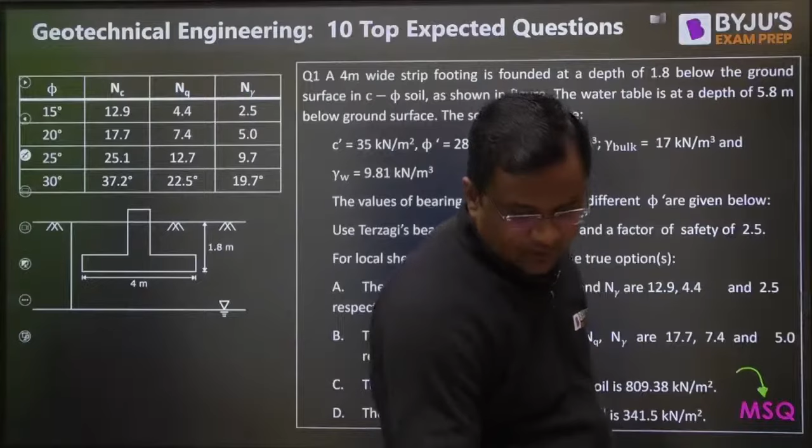The 1.8 meter is the depth and 4 meter is the width. Water table is at a depth of 5.8 meter. That means we only go up to Df, this is Df, and then B more - so 1.8 plus 4. We only go up to this much term for writing anything, and the water table is below that, meaning there is no effect of the water table.

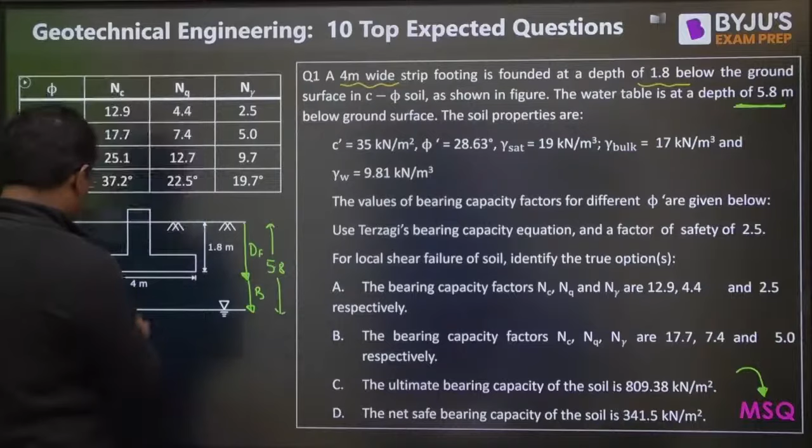Okay, C, phi, gamma bulk, gamma W, everything is given. Even if gamma W is not given, we will be taking 9.81 in every subject, not just in soil.

Now guys, using the Terzaghi's bearing equation and a factor of safety of 2.5, it is asking certain things: bearing capacity factors, ultimate bearing capacity, and net safe bearing capacity. So what is net safe? Net safe is Q net ultimate upon factor of safety. This is net safe and this is QU.

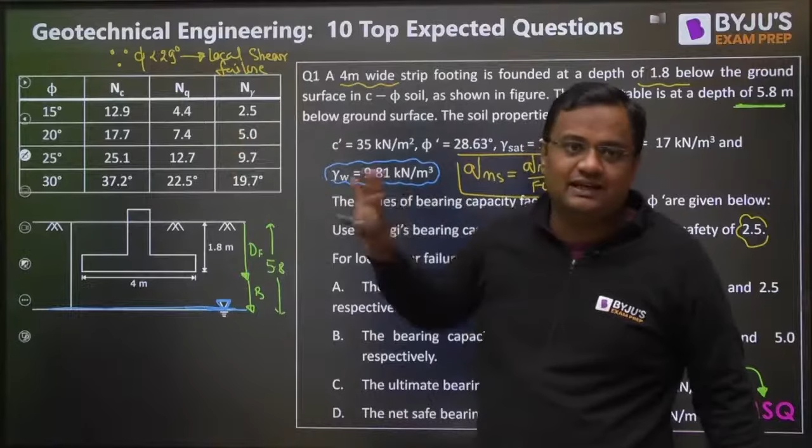Now guys, before I go further, what is the value of phi? Since phi is less than 29 degrees, it will be local shear failure, and whenever there is local shear failure, we have to slightly change the formula. In some books it is written as phi less than 28, in some it is less than 29. Since the value is 28.63, and they have given different NC, because when there is local shear failure we want different NC, NQ and gamma, that is why from the question itself we know this is a case of local shear failure.

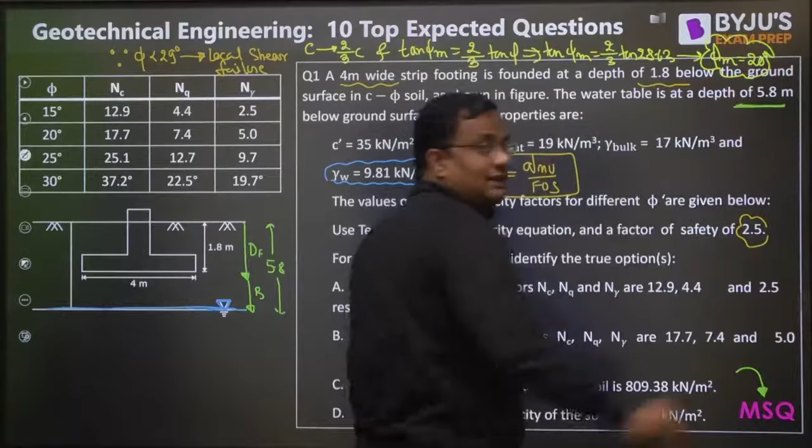Since it is local shear failure, we'll be dealing with this. Phi less than 29 or 28, it will be local shear failure. Since different values of NC, NQ and gamma are given, that means it is asking from local shear failure, so we'll be taking these values. The other values are not required at all. So 17.7, 7.4 and 5. So B is correct and A is incorrect. Excellent, Saksham, excellent.

Moving further, Saksham you are saying D is also correct. Okay, please check your calculations. Now I want to find the ultimate bearing capacity. So QU will not be writing C NC, we will be writing 2/3, because in local shear failure instead of C we will be using 2/3 C NC, plus Q NQ, plus half B gamma N gamma.

Now guys, it is a strip footing, therefore no shape modification factors. So 2/3 into C is 35. What is NC? NC is 17.7. Excellent question guys, the level of questions today is excellent.

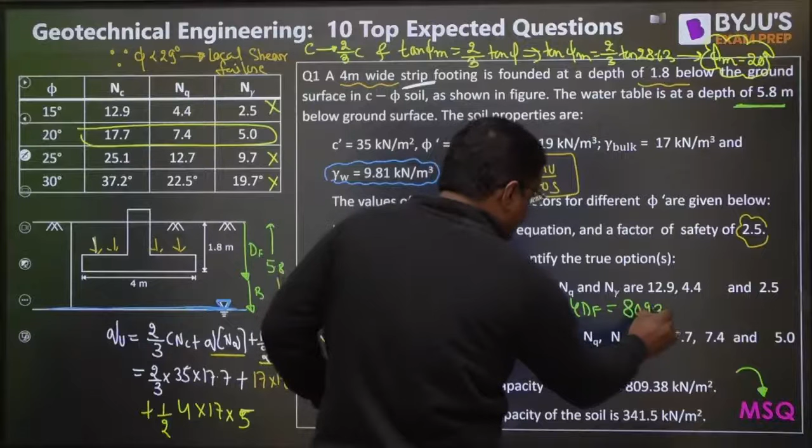Now, this is QU. What is QNU? QNU is QU minus gamma DF. QU is 809.38 minus gamma bulk into 1.8. So from here the QNU value is coming to be 778.78.

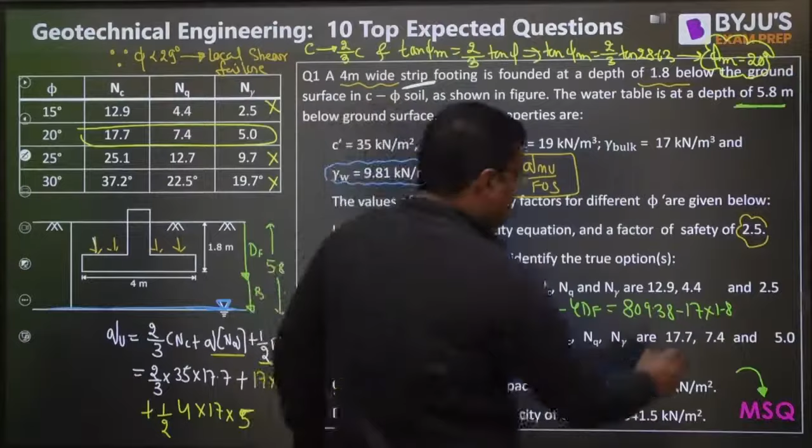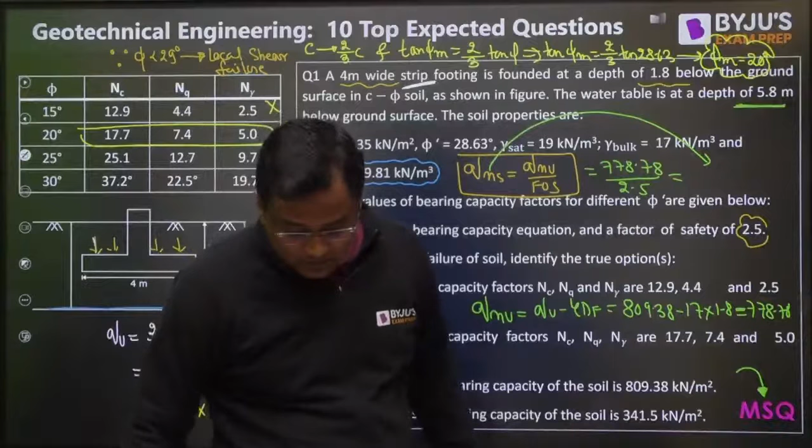778.78. Net ultimate is not asked, but okay. 778.78 upon factor of safety 2.5. So what does this QNS value come out to be? 311.5, not 341.5. So the answer will be B and C.

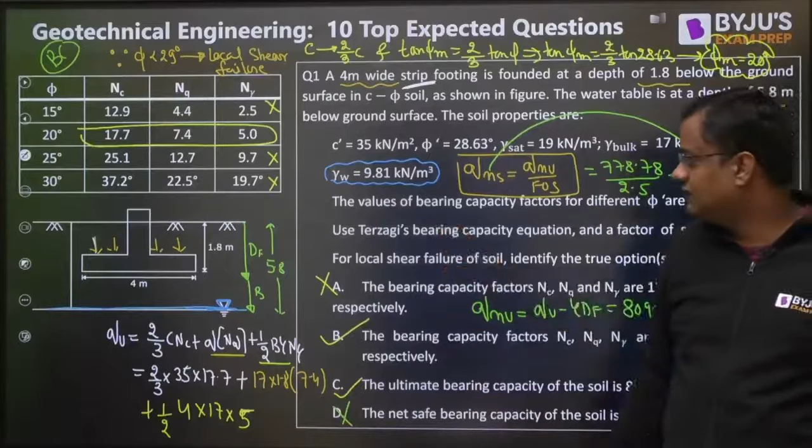Suppose there is a retaining wall, and here we are having the soil. Now what is the intensity of Q such that there is no tension crack? That means the negative part should not be coming.

So from here, sigma H is equal to Ka into sigma V minus 2C root Ka. We are getting this much.

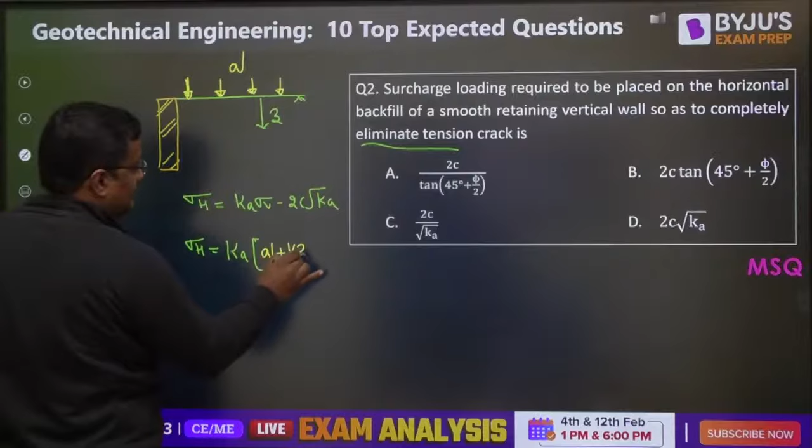Ka into sigma V, where sigma V is the surcharge Q plus gamma Z at any point. So the horizontal stress becomes Q plus gamma Z minus 2C root Ka. This should be greater than 0 - the minus value should not be coming, or at most it should be 0, not lesser, otherwise tension will come.

So from here, at the top the critical region will be this, because below it will be positive. If Z is increasing as we go downward, this will anyhow be positive. The most critical case will be at the top, so Ka Q should be greater than or at most equal to 2C root Ka.

From here the value of Q is 2C by root Ka. That is option number C, but since it is MSQ, we have to check the other options also.

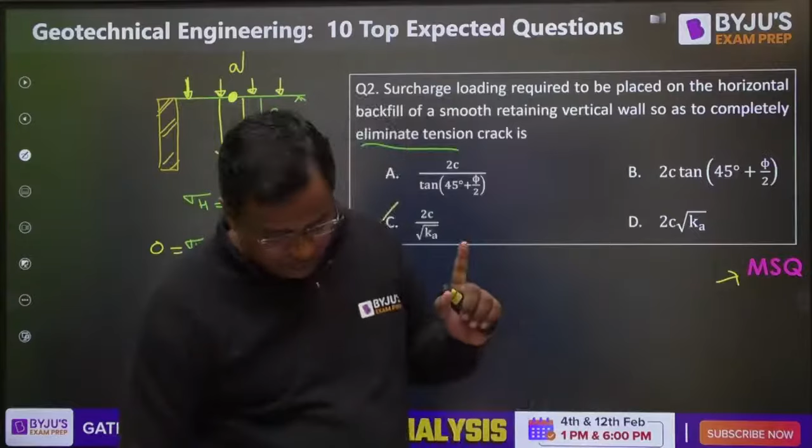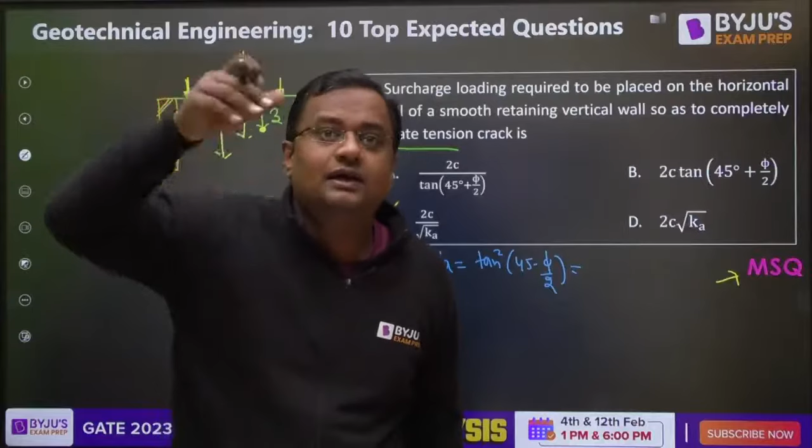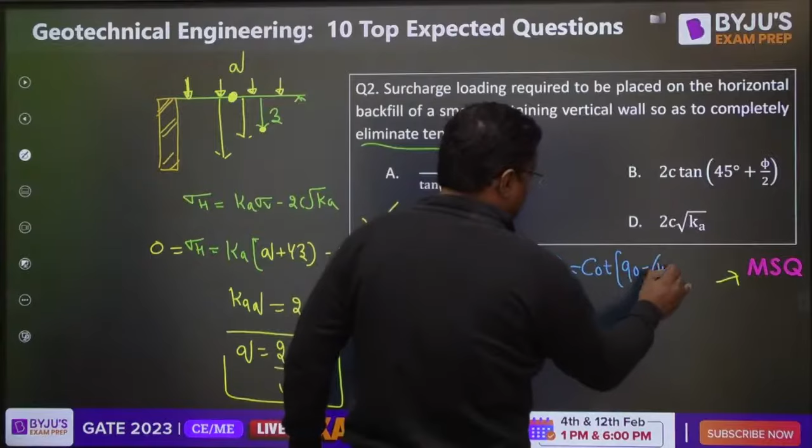So one is 2C by root Ka. Now let me tell you, moving further, Ka is sin, 1 minus sin phi over 1 plus sin phi, or it is tan square of 45 minus phi by 2, and tan theta is cot of 90 minus theta. So it will be cot square of 45 plus phi by 2.

And what is cot? Cot is 1 upon tan. So this is equal to 1 upon tan square of 45 plus phi by 2. So 2C by root Ka, and this is Ka, so root Ka will be tan of 45 minus phi by 2.

That matches another option - this minus will become plus. So from here Ka is this, root Ka will be this, and it goes above, so it will be option B. So B and C are the correct answers.

This is the level of questions that we are putting here, guys. If there are still so many less students, it means you don't want these sessions. Okay then we'll only give easy, basic questions.

If this is attendance that I am here - yesterday the whole day I was taking classes till 11:30 on YouTube only. I have paid classes, app classes, other work, making PPTs, then 6 to 8 was a paid class. Earlier also there were so many classes, then 9 to 9:30 I was with you, then at 10 we had a marathon, then in the morning I have a mock test.

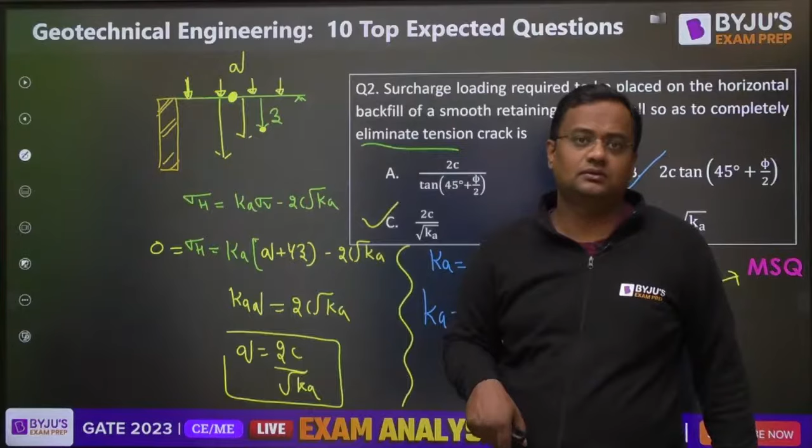Okay, now question number 3. A rigid smooth retaining wall of height 7 meter with vertical backface retains saturated clay as backfill. The saturated unit weight and undrained cohesion of the backfill are 19.2 and 25. Maximum depth of unsupported excavation, the active earth pressure at the base level of excavation, active lateral force on the wall before the occurrence of tension crack, and active lateral force on the wall after the occurrence. This is the level of questions.

Yeah, these are not just 10 questions, actually these are 40 questions that I am doing right now. Are these questions so difficult that we're being made to solve?

Okay, suppose this is a wall, a retaining wall of 7 meter high. Now saturated unit weight is given, this is gamma sat, and this is cohesion. And this all is saturated, because it is written.

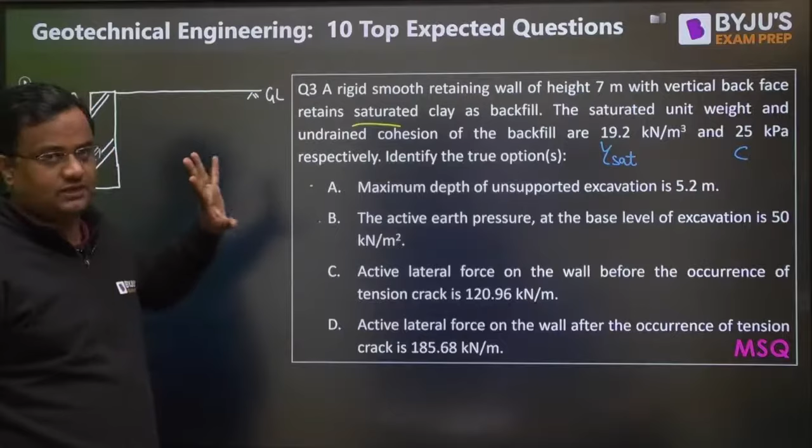Now guys, moving further, maximum depth of unsupported excavation when there is no surcharge Q. Unsupported excavation depth is given by 4C by gamma root Ka. But I told you in the daily dose concept that the depth of tension crack is 2C by gamma root Ka, and HC - this is not a fixed formula, it may change if there is a surcharge, and I proved it there.

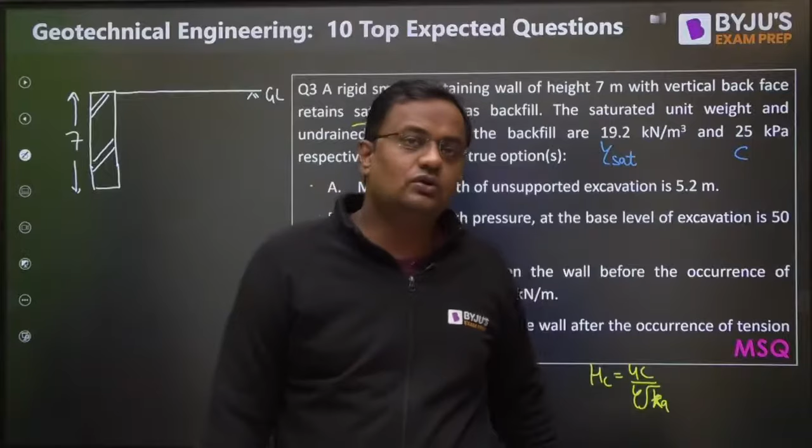I will tell you, let me struggle through it right now. So here, since there is no surcharge, we can apply this formula.

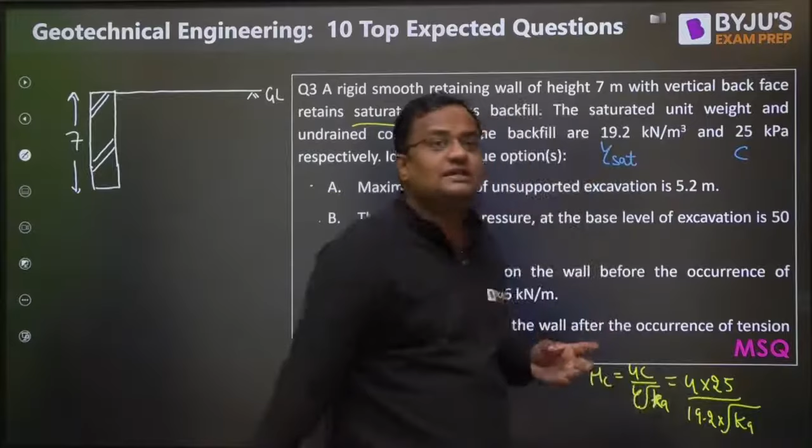And applying this formula, what answer are you getting guys? Please tell me: 4 into 25 upon gamma. What is gamma? 19.2 into root Ka. Ka is 1 minus sin phi upon 1 plus sin phi. If it is clay, phi is 0, so 1 minus sin 0 upon 1 plus sin 0 will be 1. So how much does it come to? 5.2. Please check, is it coming 5.2? Yes Saksham, please share this with everyone once.

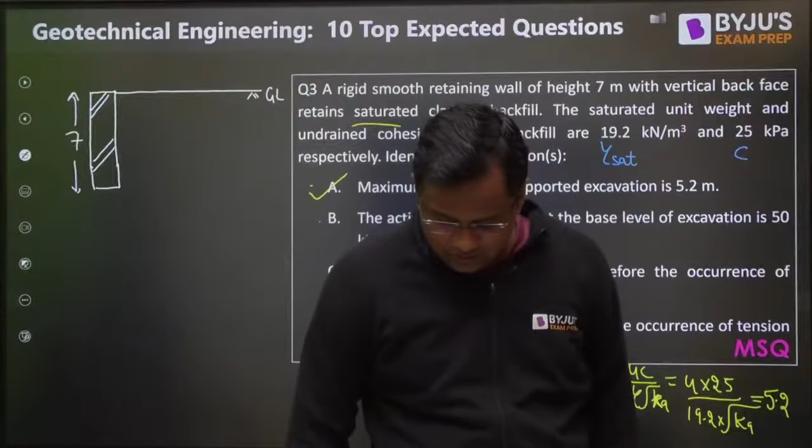So this came out to be 5.2. Now what has been asked? The active pressure at the base. Okay, now suppose the pressure is here, something like this.

Active, right? So at Z depth, any general Z depth, what is the stress? Ka into sigma V, that is gamma Z, minus 2c root Ka. So what value are you getting? Please tell me.

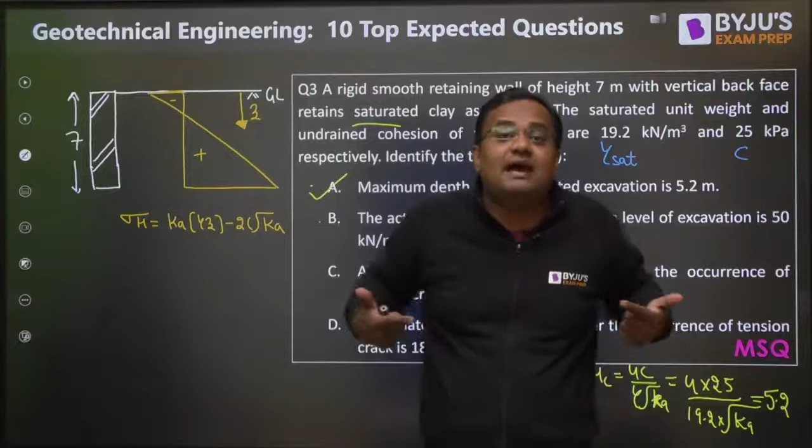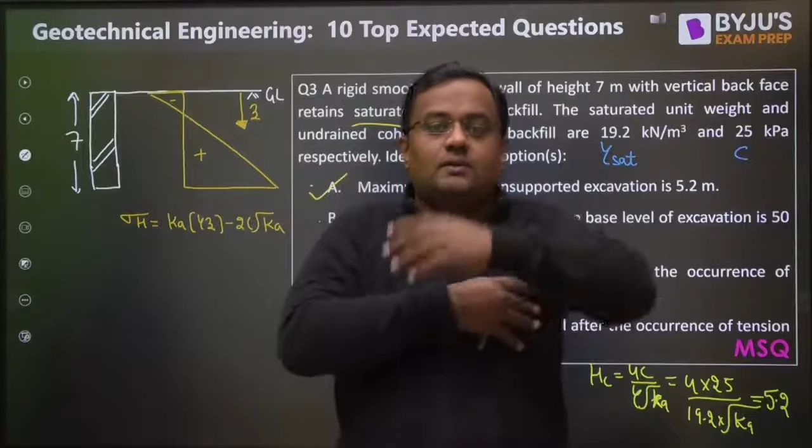Since the water table is not given, you should not take pore water pressure. The soil is saturated - it might not be in a submerged condition, it might just be saturated. I had told you once while explaining the phase diagram that there is a difference between saturated and submerged. If you put water all around me, my weight will be heavier, but there's no buoyant weight involved. But when I go inside a swimming pool, then also everywhere is water, but then buoyant weight also comes into play. So here there is no information about the water table, which means we take it as bulk unit weight where all voids are saturated. Have you understood what I want to say? Okay, I hope your doubt is cleared now - yes, it has been understood.

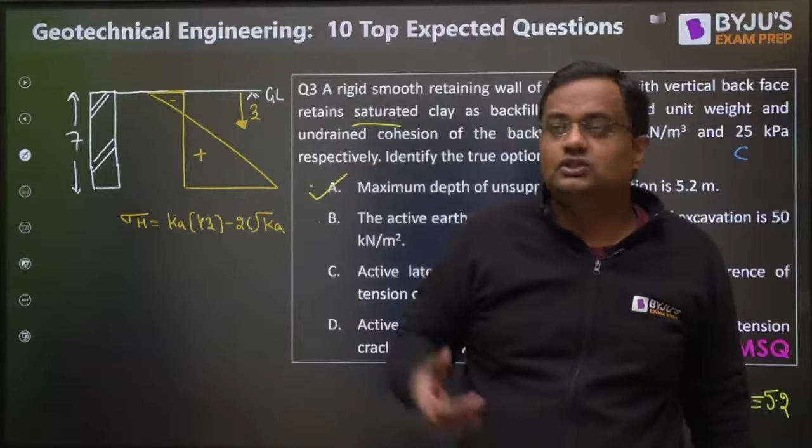Now, sigma H with Ka equal to 1 is gamma Z, that is 19.2 into Z, minus 2C. What is 2C? 50. So the general expression for sigma H comes to be 19.2Z minus 50. From here, at Z equal to 0, sigma H is equal to minus 50. And at 7 meter, please tell me: 19.2 into 7 minus 50. At 7 meter, what is the value coming?

Is it coming 84.4? Here it is minus 50, and here it is 84.4. So the active pressure at the base of excavation, is B wrong? Sorry, the active pressure at the base level of excavation is 50 kN/m² - this is wrong, na? How is it 50? It should be 84. What answer are you getting here?

What answer are you getting? The active earth pressure at the base level of excavation, considering the saturated weight and undrained cohesion of the backfill, is this. The active earth pressure at 7 meter, right? At 7 meter is 50 - no, it is at top, it is 50. At top it is 50.

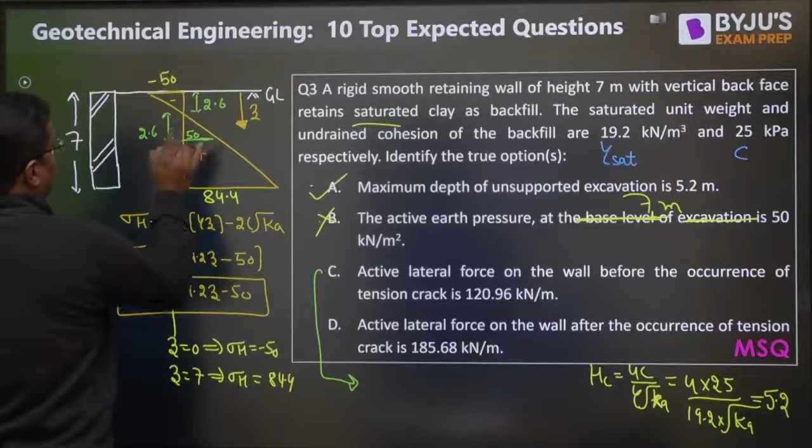Then again 2.6, so it will be plus 50 here. Similar triangle - and how much is left? 1.8 is left. Okay, 1.8 is left. Now if there is no tension crack,

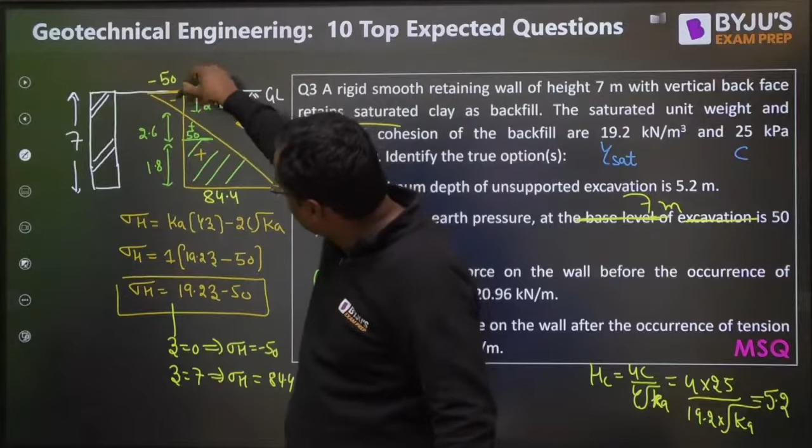that means this is also there, so minus and plus both forces are there, so it will be zero. So only this much will be there, the force due to this. Either calculate due to the whole here, but this minus and plus will cancel out now because tension crack has not developed. So this is also acting, but this acting and this acting are in opposite directions. So only we have to calculate this - or you calculate this also, then it will be zero here, minus and plus. So I'm only considering here.

So half - stress here is 50 and stress here is 84.4. Stress here is 50 and stress here is 84.4, into area. So what is the area? 1.8 into 1. So what value is coming here? Can you please let me know? 120.96.

120.96, option C. Okay, and when the tension crack has developed, this is left now, so this is not touching, only this one. So here the stress is 0, here the stress is 84.4, so the average into area is then 7 minus 2.6 into 1. If the tension crack has developed, this soil is not in contact, so only this much is there. So from here how much? 185 point, you are getting this value.

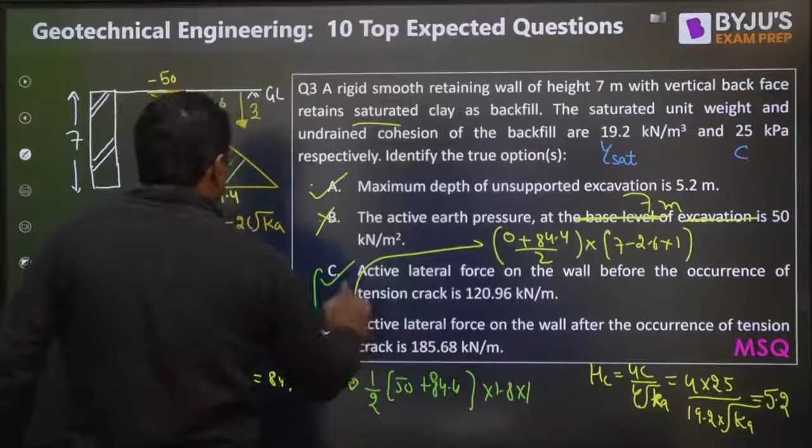Okay, so the answer is A, C, D. This is the level of questions that will be asked in GATE. That is why we are going to this much level. Understood?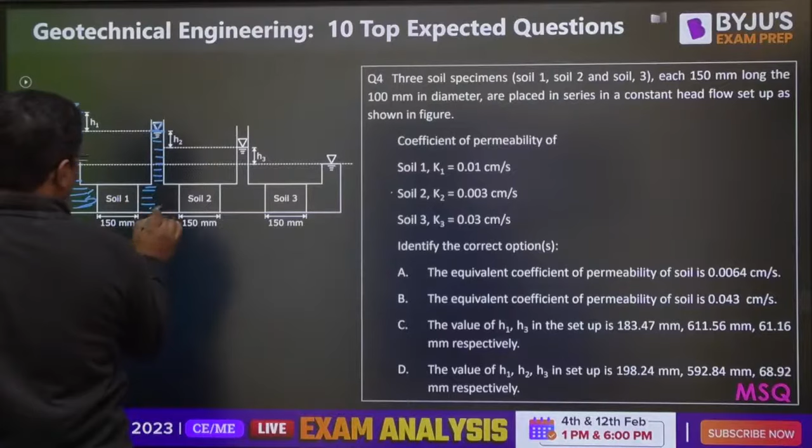It is perpendicular because discharge is the same. Perpendicular is when discharge is equal to same, so whatever water going here is also going here, is also going here. So what is the formula for K equivalent in perpendicular case?

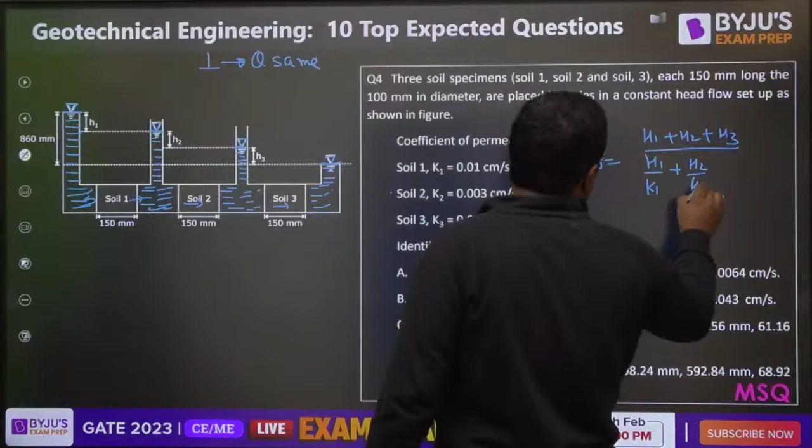H1 plus H2 plus H3 upon H1 by K1 plus H2 by K2 plus H3 by K3. K1, K2, K3 are there and H1 and H2 all are same - H1 is equal to H2 is equal to H3 is equal to 150, all are same. Okay, so from here what is the value of K equivalent?

Okay Swapnil, what is the value? Are you getting A as the option?

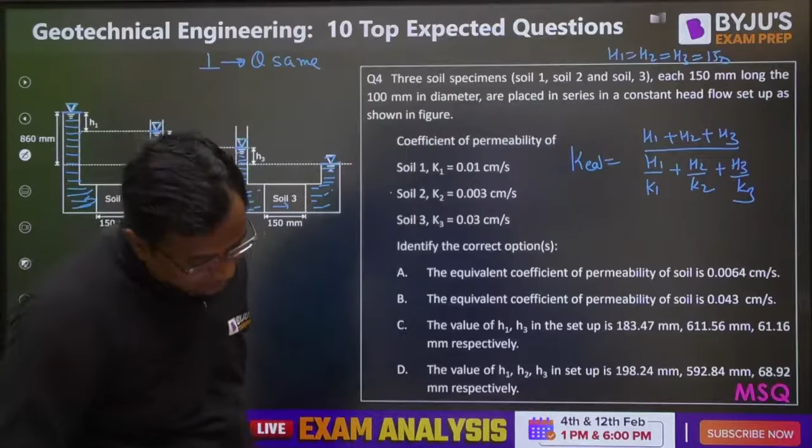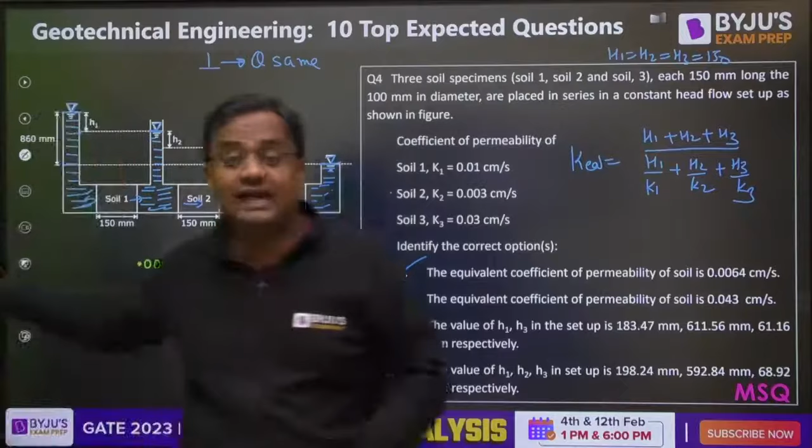So B will not be there. Now it is asking H1, since discharge is same. Let me apply the concept. Discharge is same, so KIA - if I am writing for the whole assembly, I should be writing K equivalent. I is also for the whole, from here to here. What is the loss from here to here? It's 860, because I have written K equivalent for the whole assembly. So hydraulic gradient also I will be writing for the whole - it is 860. Loss from most left to most right, all loss occurs in soil into A.

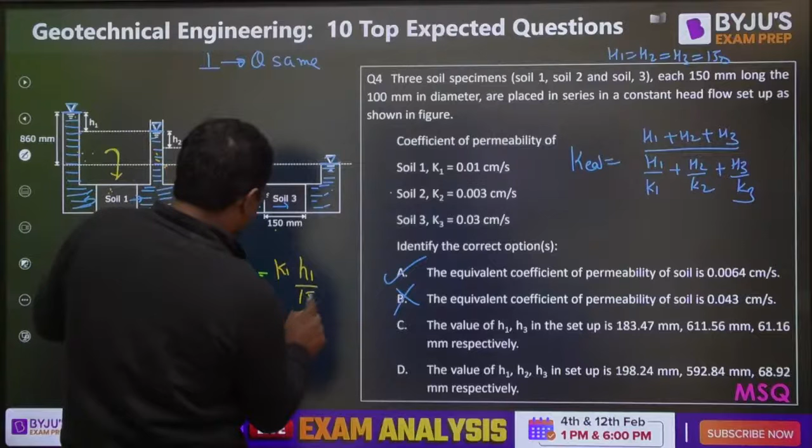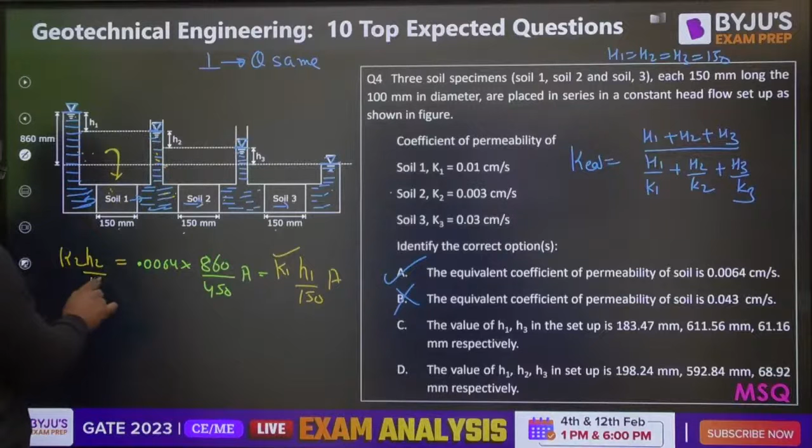Now if I write for this one, then it is KIA, K1. I is here to here. What is the loss for only this soil? Here to here, only this much - H1, and here the length is only 150 into A. So K1 is given, find H1. Similarly, for this one, K2 - what is the loss? H2 upon 150 into A. So from here you can find H1, H2, H3. C will be coming.

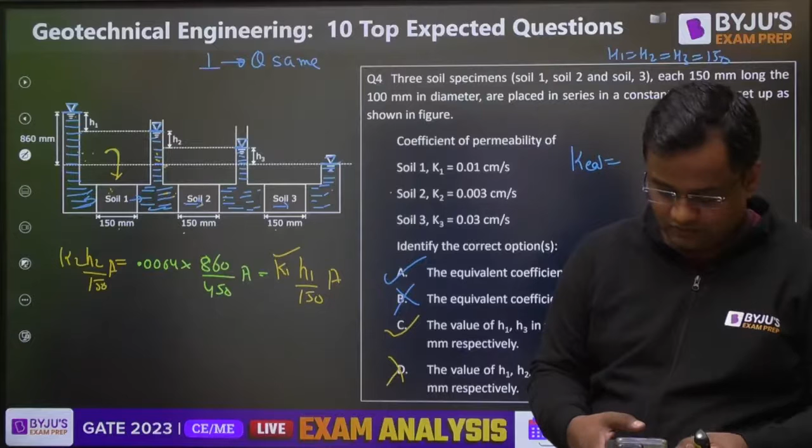Okay, let me move further. Question number 5.

Constant head permeability test is best suited for determination of coefficient of permeability of highly impermeable soil - absolutely wrong. Highly impermeable soil means clay, and for clay, the variable head permeability test is there.

Next one: coefficient of permeability of a soil mass decreases with increase in viscosity - of course, when it is more viscous, permeability will be less. The jam is not flowing as fast as water because it is more viscous.

Coefficient of permeability of soil increases with increase in temperature - yes. Because when temperature increases, for liquid mu decreases. For gases mu increases, but here it is permeability, meaning water movement, not air movement. So with increase in temperature, mu decreases, less viscous, that means permeability increases. So permeability increases - absolutely correct.

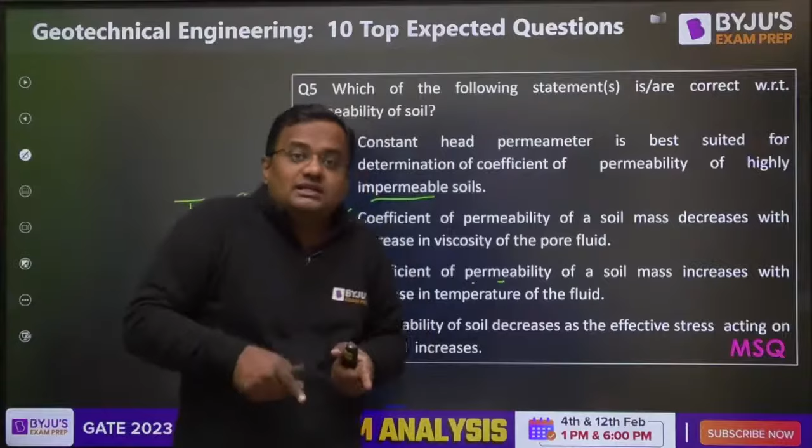Permeability of soil decreases as effective stress increases - yes. When effective stress increases, that means void ratio is decreasing. When I'm compressing something, effective stress will increase because particles will have more contact. Particles are in more contact, so effective stress increases, but void decreases - that means permeability decreases.

Now I want to ask an interesting question here, very interesting - let me see who can give this answer. Guys, have you seen formulas like K is proportional to E square and something like this? Yes, you have seen K1 by K2 equals E1 square by E2 square. You have seen that K is proportional to E square, or all these formulas. Now if you have seen this, that means more voids, more permeable - then why...

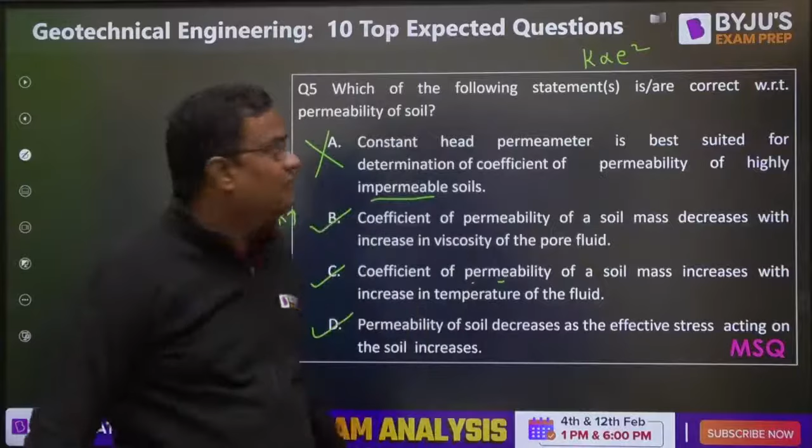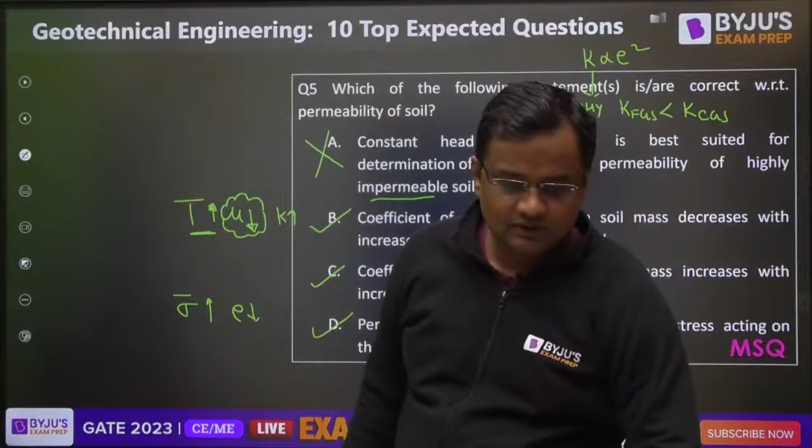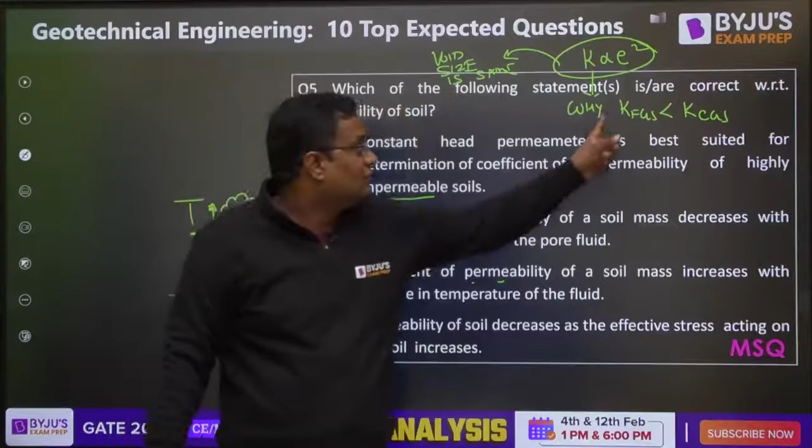Because guys, this K1 by K2 equals E1 square by E2 square - all these formulas, K proportional to E square, K1 by K2 equals E1 square by E2 square, or K proportional to E cube over 1 plus E - this is when I am comparing void size being same. If void size is same, then whichever has more void ratio will have more permeability. You might be knowing this for the first time today - you have seen these formulas throughout the year, but you are knowing this first time, that this formula is for same size of voids. For same size of voids, whichever has more void ratio will have more permeability. Here coarse and fine are not having the same size. Have you understood what I want to say?

Okay, now this one, question number 6. Everyone, good.

Fast, faster, fastest. Everyone, please let me know the answers.

Guys, what is IP? WL minus WP. What is IP of A? WL minus WP, that is 30. What is IP of B? 25 minus 20, that is 5.

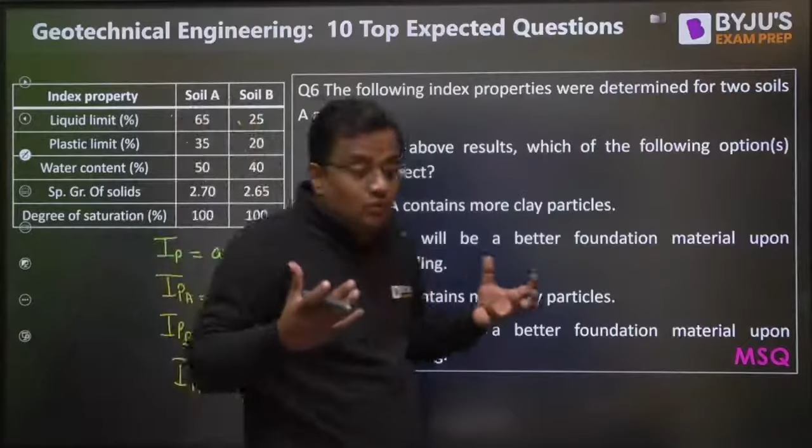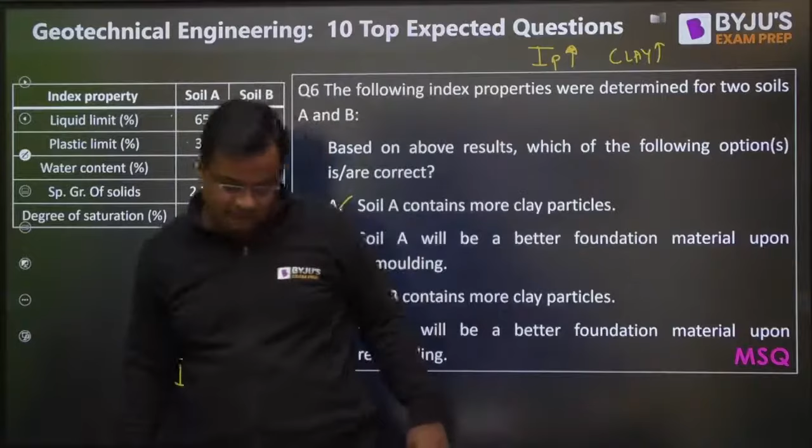IP of A is greater than IP of B. More IP means more plasticity index, and more plastic means more clay. So soil A contains more clay. If IP is more, then clay is also more. So if you want to check which soil has more clay, just find the IP, plasticity index. Whichever has more IP will have more clay particles.

Now, after this, which is better for foundation? Guys, this soil is in liquid state. The natural water content is 40% and liquid limit is 25%. So this is in liquid state. Soil B is in liquid state. The water content is more than liquid limit. Liquid limit is 25 and soil is residing here, so water content is more than liquid limit. The shear strength is negligible, 2.7 kilonewton per meter square.

Here the water content is 50%, but liquid limit is 65. So it is in the semi-solid or plastic stage. So if I have to compare A and B only, then of course A will be better. Soil A will be better.

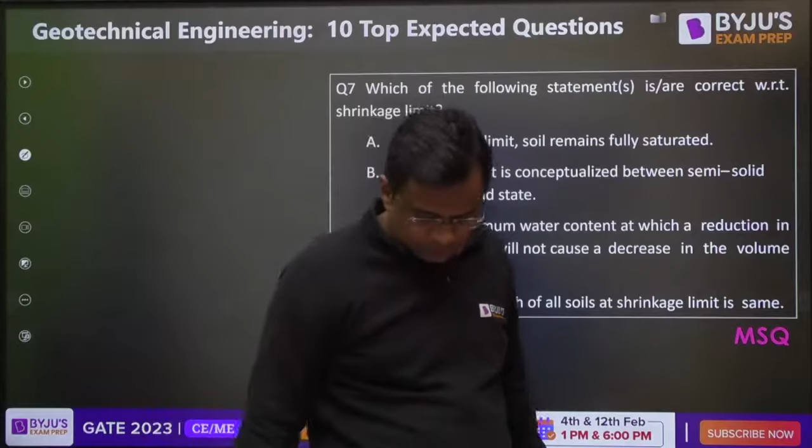Guys, at shrinkage limit, soil remains fully saturated, correct? This is the graph now. This is water content and here is the volume. This is like this, this is like this. This is shrinkage limit, this is plastic limit, this is liquid limit. So at shrinkage limit, soil remains fully saturated, correct. Shrinkage limit is the concept between semi-solid and solid. This is solid, this is semi-solid, so it is between them.

Absolutely correct. Tell me your answers. Tell me your answers, okay okay okay.

Now it is the shrinkage limit is the minimum water content at which reduction will not cause a decrease in volume. No, this condition, this is right. Reduction will not cause a decrease in volume. Yes, reduction from here will not cause decrease in volume. Volume is constant, but it is not minimum.

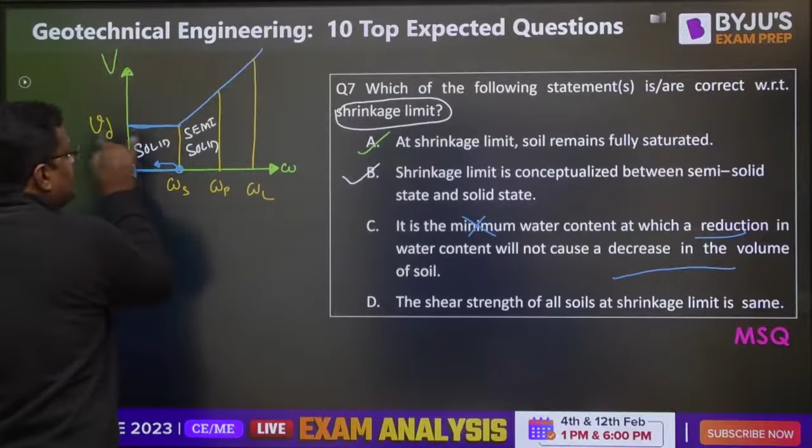It is maximum. In all these points, reduction will not cause a change if you decrease, go to the left hand side. If you go left hand side, volume is not changing. But of all these points, shrinkage is the maximum one, not minimum. Yeah, this is correct that reduction in water content will not change the volume, but out of all these, this is not minimum, it is maximum.

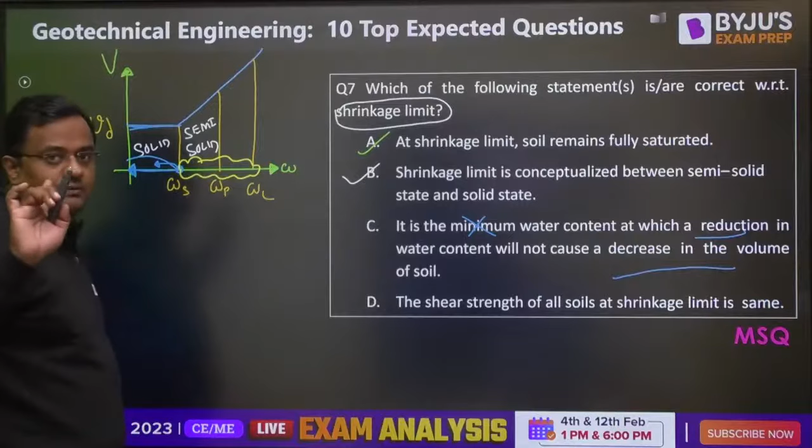If the statement is like this, that at all these points saturation is 1, and in that shrinkage is minimum, that is correct. Okay, the shear strength of soil at shrinkage limit is same - absolutely rubbish. Shear strength is same at liquid limit, 2.7 kilonewton per meter square. Strength is same at liquid limit, okay, not at the shrinkage limit. Got it?

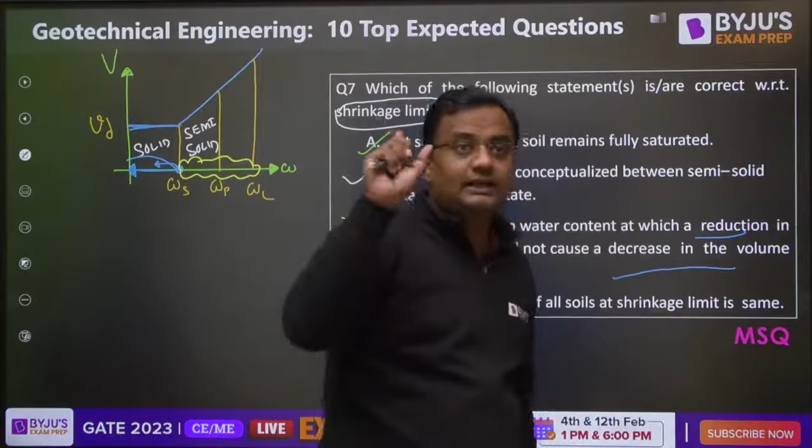Okay, now move to question number 8. A fine grained soil, 60%. Soil behaves as semi-solid. This is water content, this is volume. Okay, this is like this, this is like this. So this is shrinkage limit, this is plastic limit, this is liquid limit.

Here it is solid state, here it is semi-solid state, here it is plastic stage, and here it is liquid stage. Now the plasticity index - fine grained soil 60% is silt. Soil behaves as semi-solid when water content is between 15 and 28. So this means this is 15% and this is 28%.

Semi-solid. The soil behaves as fluid, that means liquid. Then it is 40%. This is 40%.

Now, plasticity index, also called IP, is WL minus WP. So 40 minus 28 is 12%.

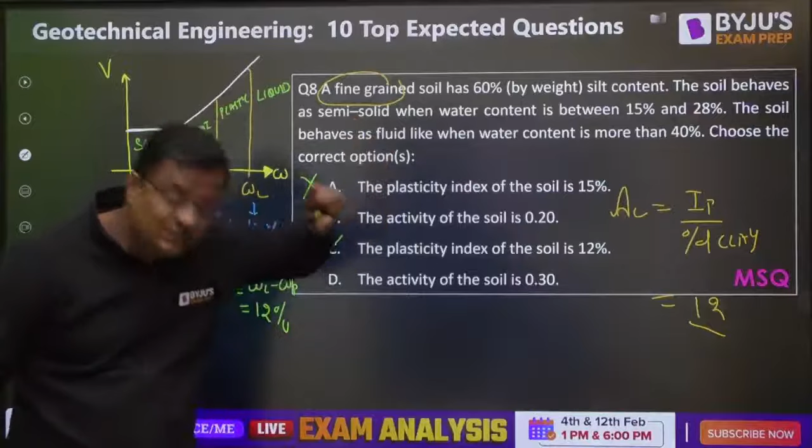Like this. And what is activity ratio? This is IP upon percentage of clay particles. IP is 12, and if it is fine grained soil, that means no gravel, no sand, and 60% is silt, that means 40% will be clay. So it will be 0.30. That is 12%, by percent you write, it will be 0.30. Have you understood this? So answer will be C and D.

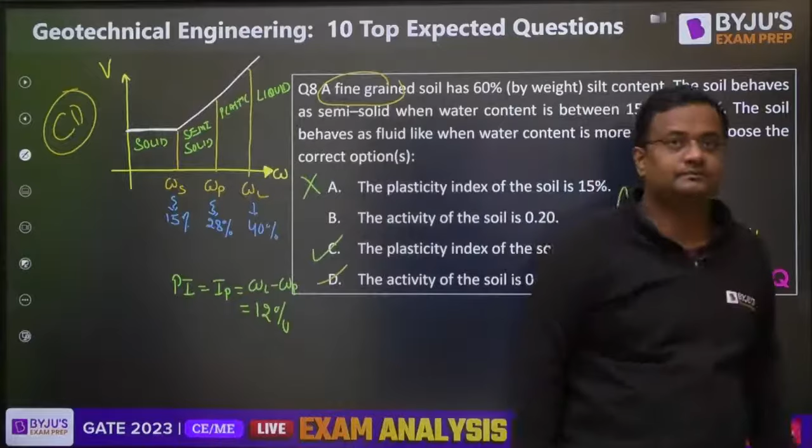Moving to question number 9.

So if I make a graph like this, with E and effective stress, then when void ratio is 1.1, stress is 175, and when void ratio is 0.9, it is 300. Slope of this curve is AV, that is E2 minus E1. If I take magnitude, 0.2 upon 300 minus 175 is 125. So from here, what is the AV value you are getting?

This one. Now coefficient of volume compressibility MV is equal to AV upon 1 plus E naught. AV is 1.6 into 10 to the power minus 3. 1 plus E naught is 1 plus 1.1. You will be getting this value.

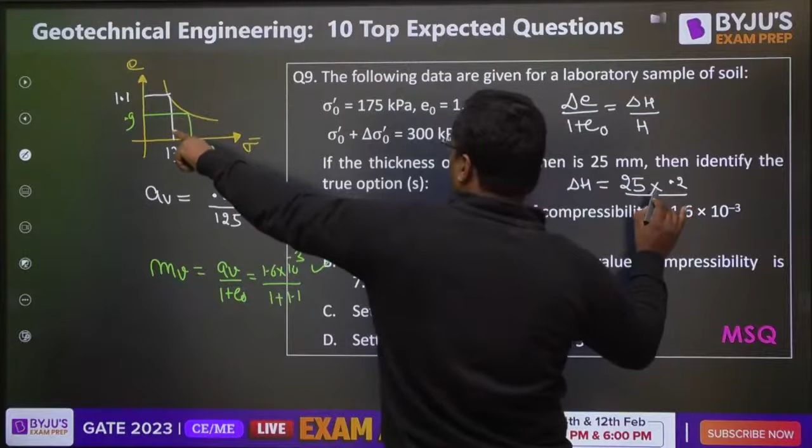Now moving further to the next part, it is asking settlement of clay layer. What is settlement? We know the formula: delta E upon 1 plus E naught equals delta H by H. So delta H is equal to, what is the height? 25 mm. 25 mm into delta E. Delta E is 0.2, 1 plus E naught is 1 plus 1.1. So what is the value you are getting from here?

2.38 mm. Even if you apply the formula H naught into MV into delta sigma bar: H naught is 25 mm, MV is this, and delta sigma bar, 175 to 300 is 125, then also you'll be getting this answer. Have you understood this?

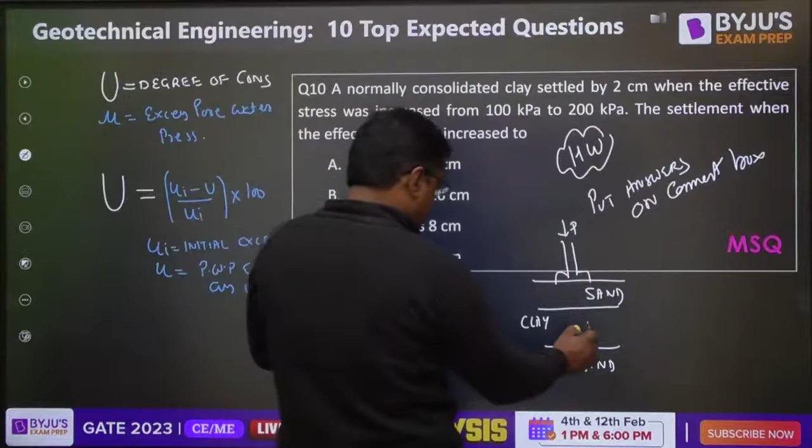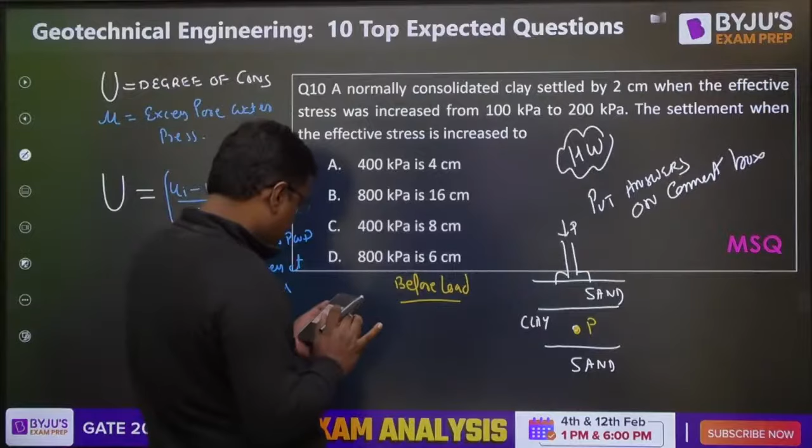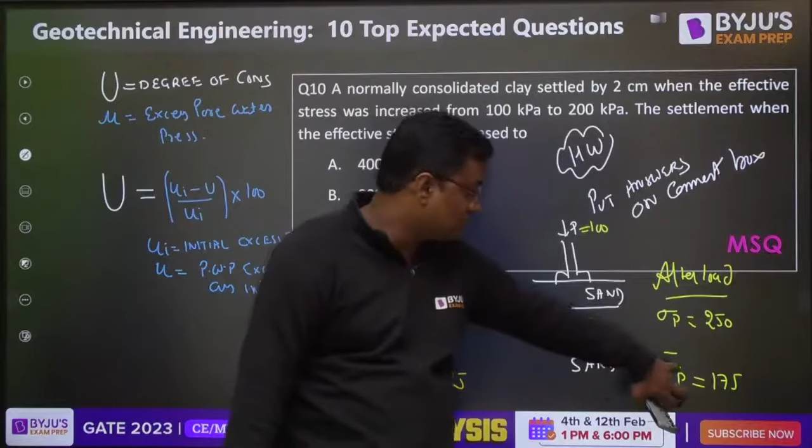Now coming after loading. After loading, construction of a building has occurred, vertical stress of 100 is added. Now what is sigma P? Earlier it was 150, now 100 load is coming, so it becomes 250. And the vertical effective stress, sigma bar P, at some instant after loading is 175, as given in the question. So sigma P minus UP: sigma bar P after some time is 175, so sigma P minus UP gives us U at that time, which is 75.

And what is U excess here? Since 25 was already there due to the water table or some other reason, what is the excess? It is 75 minus 25, which is 50, because 25 was already there before.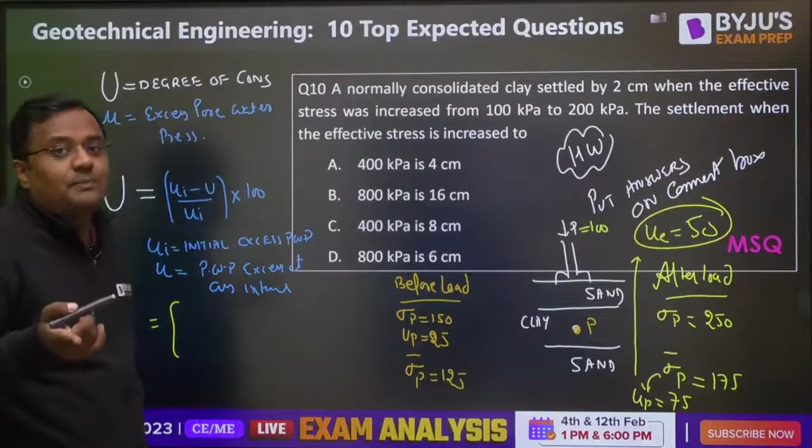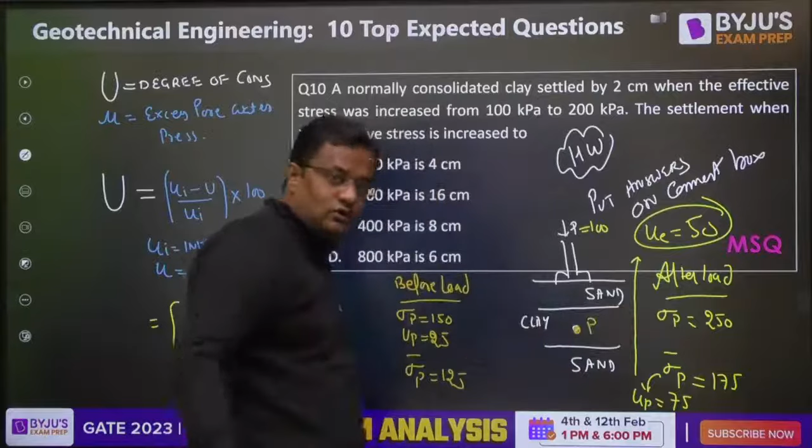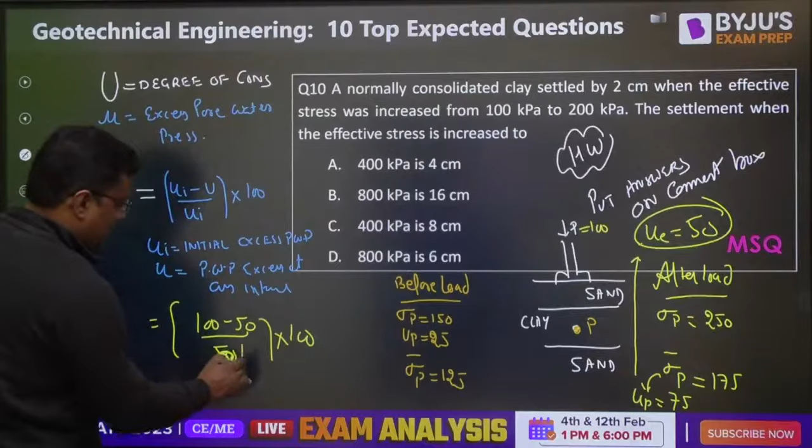Come to this formula. Initially, whatever load is applied, that goes into total stress also: 150 plus 100. And it also goes into the water pressure: initially the water pressure would be 25 plus 100, that is 125, because whatever load is applied goes into water pressure too. So initially, what is UI? It is 100, whatever load applied goes into water pressure. After some instant, what is U excess? It is 50, since 75 is the total but excess is 50. So the degree of consolidation is 50 divided by 100, which is UI, giving 50% or 0.5.